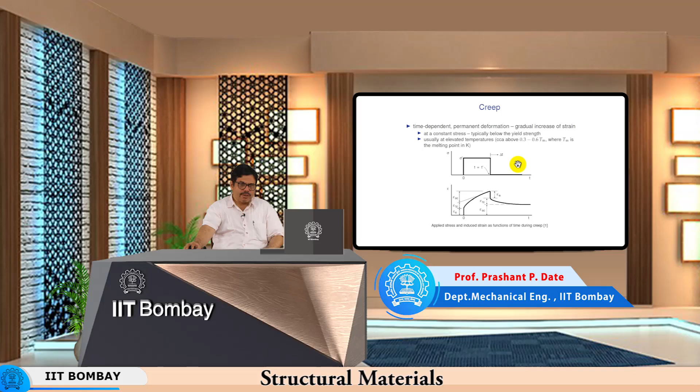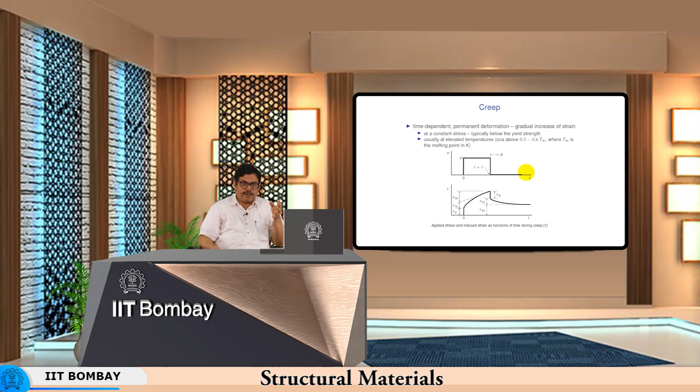We have seen that creep is basically a time, temperature and activation energy controlled process, and it happens at a constant stress, typically below the yield strength. So, there is a difference between the consideration of the stress being maintained below the yield strength. Normally when we design a high temperature boiler or an engine cylinder, it is subjected to a lot of internal stress as well as temperature. And now in spite of being below the yield strength, supposing one has used a yield limited design, let us say one has designed a boiler to consider yielding and fatigue related issues, a leak before break type of paradigm.

Still it is not enough to design a pressure vessel based on these two considerations. One has to look at the creep related issues also, because even if the material is below the yield strength during operation, since it is working at a high temperature for prolonged periods of time, it can still undergo a significant amount of creep strain. What is a significant amount of creep strain depends upon how much strain would be permissible, how much strain would not interfere adversely with the functioning of that high temperature pressure vessel or high temperature equipment, and that is something that one has to decide. So, we look at the mechanical behavior of the material under creep conditions.

Creep is basically a phenomenon that occurs below the yield strength. You might not have stressed the material beyond the yield strength, but the mechanisms which operate are time, temperature and activation energy dependent. Basically diffusion is the rate controlling mechanism. So, it has nothing to do really with dislocation movement. When you talk about yielding, yielding is something that occurs when the dislocations just start moving, but here there is nothing like dislocation movement. The creep will take place purely governed by diffusion. So, that is where the strain can occur even below the yield strength of the material.

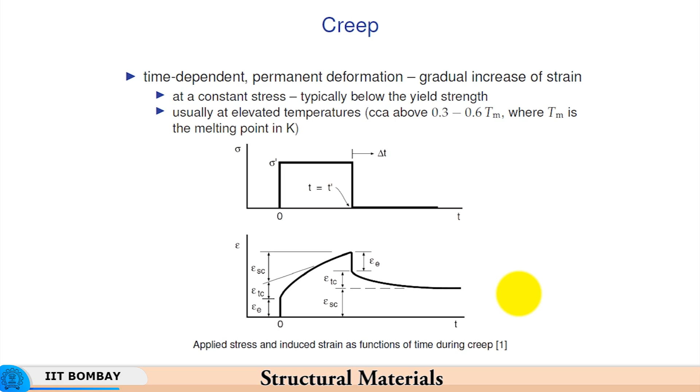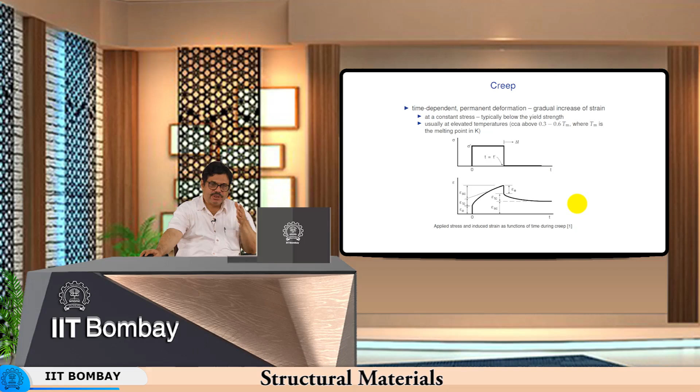And so, the life of the component, for example, you have certain tolerances given for certain dimensions, and because of creep over a period of time these dimensions get distorted or these dimensions increase, let us say. There is a strain in the component. Then as a result of that creep strain, the component has to be replaced because it is no longer able to function the same way as it is designed to function. So, the life of the component can often be curtailed, not because it has yielded, but because it has acquired a certain creep strain after functioning for a prolonged period of time under high temperature and high stress.

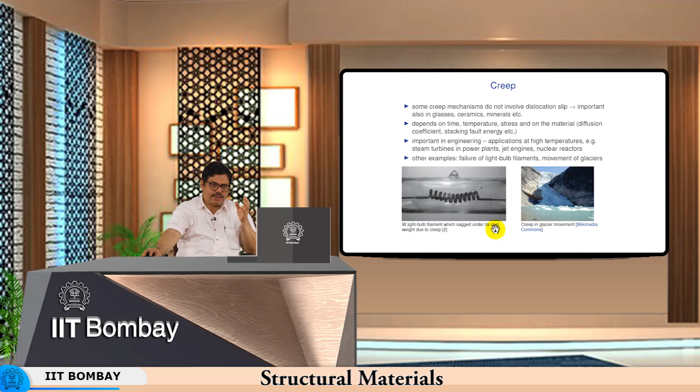Now, some creep mechanisms, as has been said, do not involve dislocation slip, and one of the classic examples of creep is the creep of the heating element in an incandescent lamp, where over a period of time it gets heated up and then it sags progressively due to creep. Under its own weight it sags, and therefore after a certain duration of service at the service temperature, it will finally sag beyond limits, meaning it will break.

So, that is how creep damage gets accumulated in this filament. It is important in engineering applications like steam turbines in power plants, jet engines, and nuclear reactors. Typically, steam turbine blades have to withstand very high temperatures. Even gas turbine blades have to withstand even higher temperatures, because steam turbines operate at much lower temperatures compared to gas turbines. In gas turbine power plants, the temperatures to be withstood are even higher, and then with the

pressure acting on the turbine blade, the temperature is an excellent recipe for the turbine blades to change their size and shape. And so, beyond the limit, the turbine blade will become completely inefficient in converting the energy in the high pressure gas into power. Essentially then the blades have to be changed because of the change in the blade angles or blade geometry as a result of creep. And creep is inevitable when a material is exposed to high temperature and pressure for a duration of time. Jet engines, nuclear reactors.

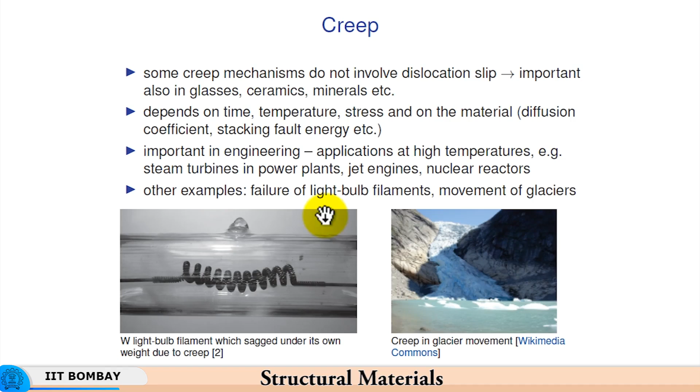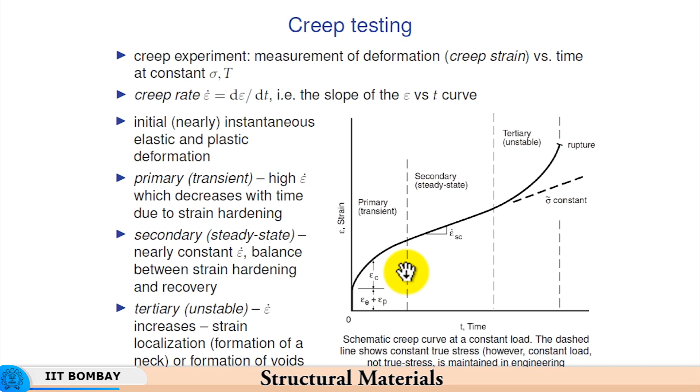So, generally we have three stages of creep. One is the steady state creep, which is of interest to us. The primary creep is the transient creep, which lasts for a very short period of time, but then here this is the most important zone. So, we need to widen this zone to the extent possible and not get into the tertiary creep region until the material ruptures. So, we have seen the corresponding creep strains and the effect of stress and temperature.

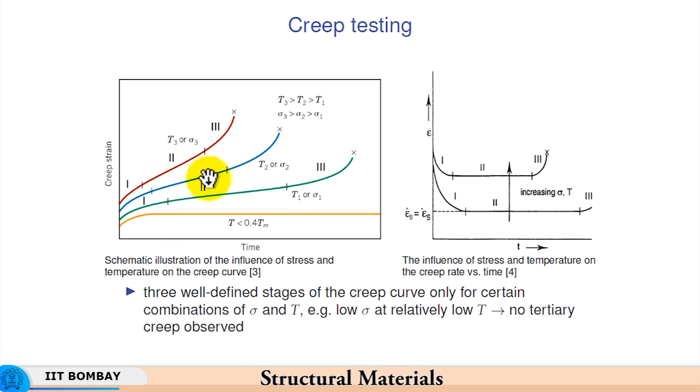So, as stress and temperature or both increase, the creep rate also increases. The steady state creep is higher at higher temperatures and higher stresses. Here we see that the rupture life comes down as the stress increases, and also with increase in temperature. This is again because of the creep damage or the creep strain getting accumulated continuously, and after a certain time it would rupture. Now, you have creep strain rate under steady state.

The creep strain rate continues to increase with time, and for a given time the stress which can be withstood diminishes with increase in temperature, because then creep will become increasingly faster with an increase in temperature. So, at a smaller temperature the material can withstand higher stress for the same creep strain.

Since creep is something that happens over a long period of time, we need to understand the properties within a reasonable duration of testing. A tensile test, for example, might last for say 20 minutes, 25 minutes, half an hour, but a creep test might last for several years. So, the creep strain which might be measurable can be generated over a long period of time of several months or several years. Since we do not have so much time to wait and get the results out, from an application point of view we need to finish the creep test in a reasonable period of time, and that is the reason why we need accelerated creep tests.

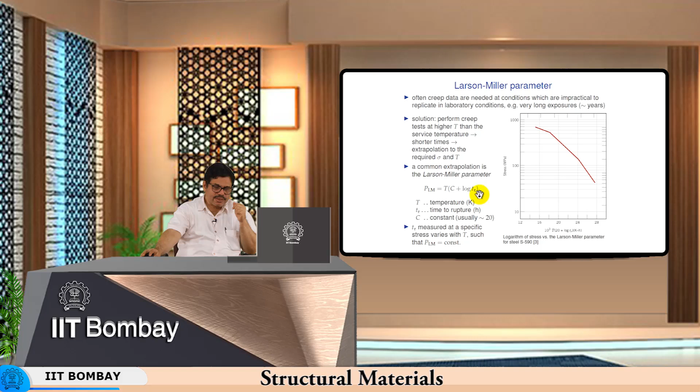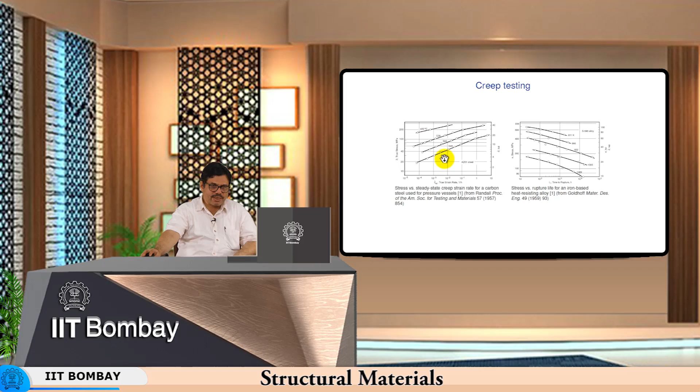Now, to bring together two of the three parameters, we have stress, time, and temperature. So, instead of having a 3-dimensional plot, we can generate a 2-dimensional plot only by combining the effects of temperature and time, because as temperature increases or as time increases, the effect on stress, as we saw in the previous graph here. So, as the time increases or temperature increases, the stress levels behave in a similar way.

So, what we need to do is combine the effect of temperature and time. If the temperature is higher, time for rupture is lower. If temperature is lower, time for rupture is higher. As we see here from this creep rupture test also, for a given stress, at high temperature you have a smaller rupture time. At 550 you have a larger rupture time, and at 800 degrees centigrade it will rupture faster. So, the stress is lower and rupture is faster.

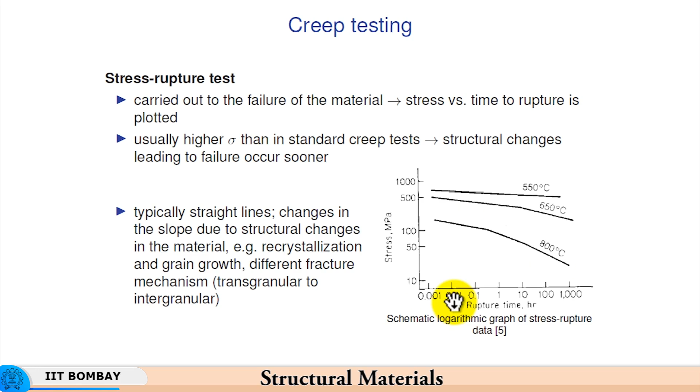So, what it means is that rupture time and temperature of testing both act in the same way on the stress: the stress capability gets reduced with increasing temperature, and it gets reduced with increasing time, as the creep strain increases. So, that is the reason why we can combine the effects of temperature and rupture time into a Larson-Miller parameter,

which is given here. And then you plot this parameter in terms of C plus log of time to rupture, where the time to rupture is in hours, and C is a constant, 20. One plots this in terms of 1000. So, this is 12,000, 16,000, 20,000, 28,000 and so on. So, the Larson-Miller parameter is plotted in thousands. One can plot the stress here, and then you see three discrete zones in terms of rate of decrease of

stress. So, the stress capability is reduced with increasing Larson-Miller parameter. For a given Larson-Miller parameter, say 16,000, various combinations of temperature and time to rupture which give the same Larson-Miller parameter will result in the same single value of stress capability. So, that is what it means. Once the Larson-Miller parameter is constant, the stress capability remains the same. That is the advantage of combining these two effects. That is why there is a one-to-one correspondence between the stress capability and the Larson-Miller parameter, which is a combination of temperature and time to rupture.

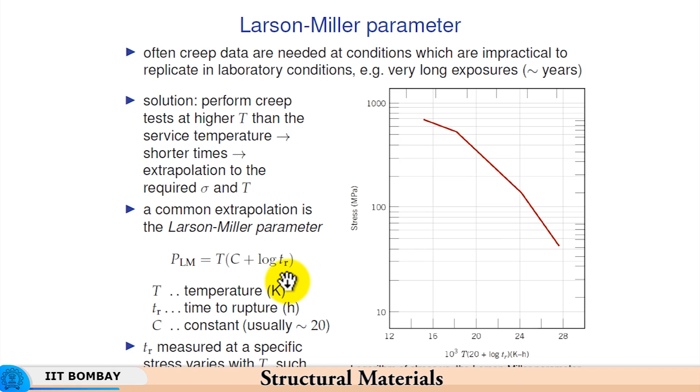Now, comparatively, the strain that is recovered here differs between polymers, metals and ceramics. In polymers, practically the entire creep strain can be recovered, because the mechanism of deformation is different. You have chain molecules which get extended during the creep process, and then they can contract as the stress is brought down, and then you have a complete recovery of creep strain. So, creep is not such a major problem in the case of polymers,

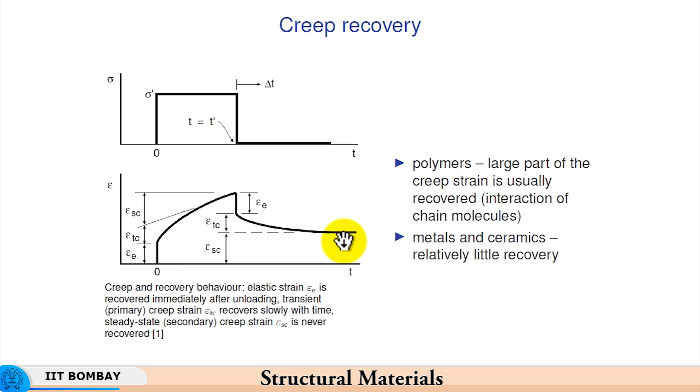but for metals and ceramics the recovery is very little. So, this is the final creep strain at the maximum load, but when you release the load, not everything gets recovered, very little gets recovered here, and that is the reason why one needs more attention with metals and ceramics. Creep of metals and creep of ceramics requires greater attention because of the creep strain being retained to a substantial degree.

The structural changes that take place during creep are diffusion related changes. There is a lot of diffusion taking place because of time, temperature, activation energy type of processes operating in the material. The deformation at elevated temperatures is usually inhomogeneous, and as the temperature increases, the component of dislocation slip will reduce, subgrain formation will take place, and recovery processes will start, and grain boundary sliding will become increasingly important as the temperature goes up, because as the temperature exceeds the equicohesive temperature, grain boundary sliding will dominate the entire set of mechanisms. That is the reason why with increase in temperature, the three different mechanisms which are concurrently operating will change in terms of emphasis, or contribution.

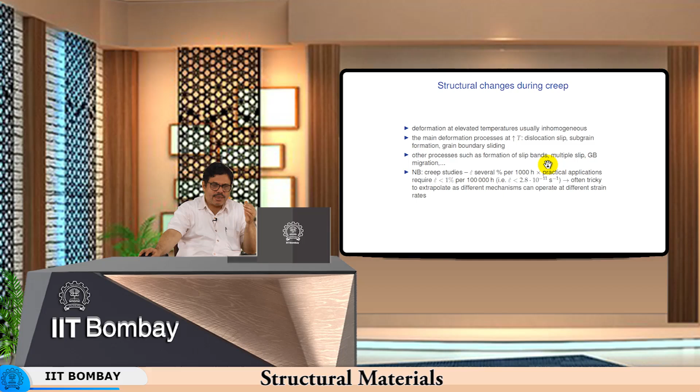So, formation of slip bands, multiple slip, grain boundary migration. These are also processes which depend upon the dislocation density of the material. For example, if the dislocation density is very high, then grain boundary migration can take place. If there is a big difference between the grain sizes, then bigger grains will grow further in size at the expense of the smaller grains. So, different kinds of processes resulting in change in the grain size would take place during the course of creep.

So, if you have very small grain size initially during the entire creep process, there can be some growth in the grain size, but then on the whole the creep resistance comes down. The strength under creep comes down with increase in temperature and increase in grain boundary area, because the grain boundary becomes weaker at high temperatures, and therefore most of the deformation gets concentrated in the grain boundaries, and so the resistance to deformation goes lower and lower as the grains become finer under creep conditions. So, we need as large a grain size as possible so that the creep is resisted.

Now, what we are looking at, the amount of creep strain, as I told earlier, is extremely small strain developing over a large period of time. So, we have a strain rate of less than 1% per 1 lakh hours. Okay. So, basically 2.8 into 10 to the power minus 11 seconds inverse is the strain rate, I mean an order of magnitude of strain rate that can be tolerated. I am not saying expected, because expected is 0, but you cannot avoid creep strains at high temperatures and stresses. Therefore, the strain rate has to be maintained.

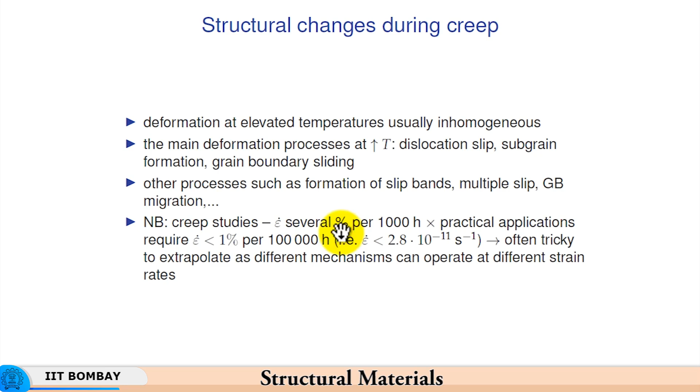Mind you, the loading is below the yield strength, the loading is below the yield point of the material, and so your creep strain rate has to be maintained below a value of, let us say, 2.8 into 10 to the power minus 11 seconds inverse, right. So, this is a strain rate which is a total outcome of various mechanisms operating concurrently. Now, different mechanisms and different slip systems can come into operation at high temperatures, or they can get activated at high temperatures. So, that is how the structural changes take place during creep.

When you have dislocation slip taking place, then Mg and Zn undergo non-basal slip. Normally, basal planes of the hexagonal close pack structure are one of the most favored planes for slip, particularly when the temperatures are relatively low. The slip system involving the basal planes of the HCP crystal is very active, but as the temperature increases, different slip systems like non-basal, that is prismatic slip systems, get activated, and they are the ones which can take over. So, the resistance to creep deformation will change depending upon the plane on which slipping is going to take place.

Similarly, other slip systems such as 100 are not really favorable slip systems under normal conditions. So, 111 is a favored slip system under room temperature or low temperature conditions, but some of the so-called unfavorable planes also get activated above 200 degrees centigrade. So, basically those planes which are not really close packed planes in a face centered cubic crystal can also get activated, because now, mind you, you are not talking about creep strain as a result of purely dislocation movement. There are many other mechanisms like diffusion which are going to get activated, and so the other slip systems, which are not as close packed as a 111 plane, can also get activated. So, non close packed planes and directions can also get activated only because of a high temperature.

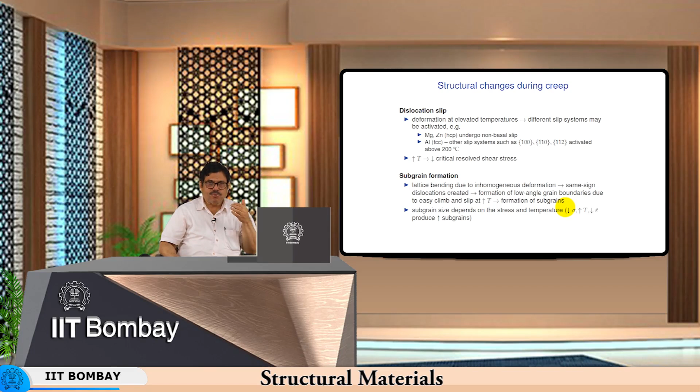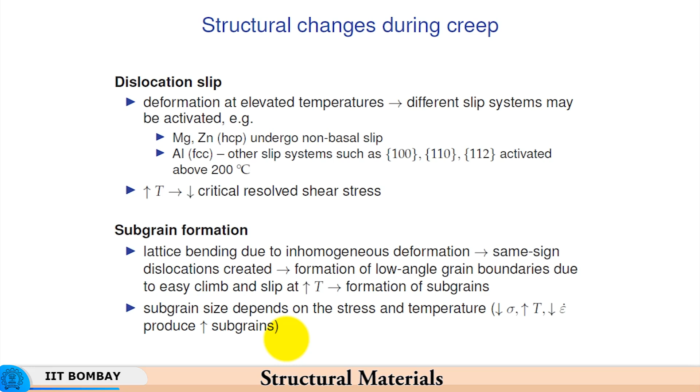So, as the deformation due to dislocation gets accumulated, same sign dislocations are created, then the subgrain boundaries are created, and these subgrain boundaries finally become grain boundaries of a very low angle. So, these subgrain boundaries get developed into low angle grain boundaries subsequent to recrystallization, and subgrain size depends on the stress and temperature. So, as the temperature increases, stress is lower, strain rate is lower, it produces larger subgrains. If the stress is more, strain rate is more, then the subgrain size would reduce, because the dislocation density will be more, the subgrain boundaries will be much closer to each other, and therefore the size of a subgrain would be much less in case of high stress and high strain rate.

We have seen that the structural changes during creep include another phenomenon called grain boundary sliding, where there is shear across the grain boundaries, and this grain gets displaced with regard to the other. So, here you have created a deficiency of material, you have excess of material, and this is compensated by other mechanisms like diffusion, for example.

So, that is the reason why the process is diffusion controlled. For example, if this is grain boundary sliding that is taking place, and then it introduces deficiency of material on one side and excess material on the other side, we need some transport mechanisms to maintain the continuity of the material, to prevent any discontinuities in the material from being created, and therefore, we need mechanisms like diffusion and grain boundary migration to take place, so that these deficiencies get compensated for, material which was in excess here gets transported here.

So, that is the kind of process. So, that is the reason why diffusion becomes the rate controlling process. So, the creep rate depends upon the rate of diffusion.

Now, if you take materials like tungsten, refractory alloys like tungsten rhenium or molybdenum tungsten and so on, there the creep rate is so low because the diffusion is very small, the diffusivity of atoms is extremely small, diffusivity of solutes through the crystal structure is extremely small. These are all body centered cubic materials, the refractory materials are usually body centered cubic, be it tungsten or molybdenum, and these materials permit very little diffusivity through the lattice.

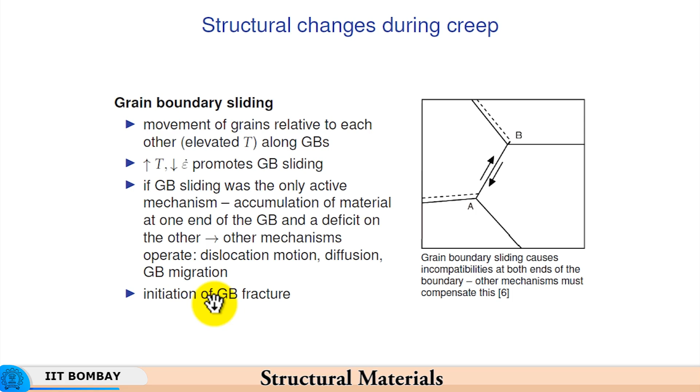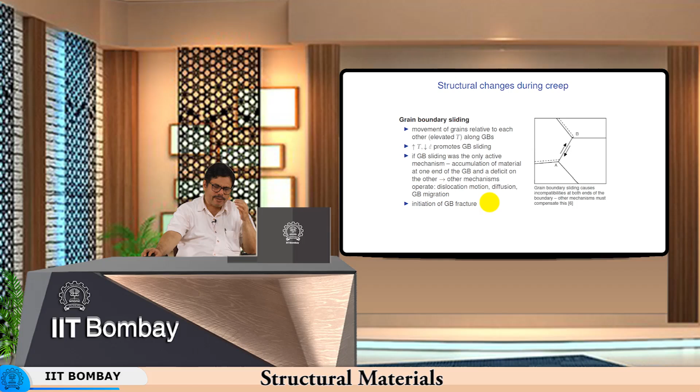So, if the diffusion does not match the rate of grain boundary sliding at some point, then fracture takes place, grain boundary fracture. In fact, the triple junction will start, because these three grains may start moving away, and then you will generate a void at this triple junction, which will propagate and finally end up as a failure. So, the grain boundary fracture finally will take place if the creep mechanisms do not operate in unison, or they don't compensate for each other adequately.

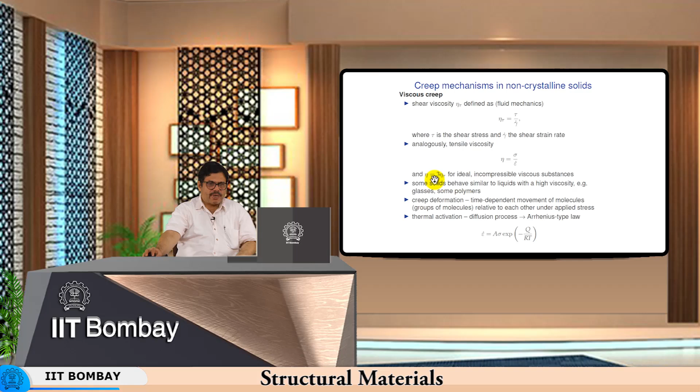So, if you take viscous creep, increase in viscosity at the grain boundary would take place. I mean, it would vary depending on the temperature. So, this is the shear viscosity, tau upon gamma dot, shear stress divided by the shear strain rate, and the tensile viscosity analogously is sigma by epsilon dot. And if we take the viscosity in tension and in terms of viscosity under shear, the viscosity under tension is 3 times the viscosity in shear. So, that is what one can derive for ideal incompressible and viscous substances.

So, you have some solids which behave similar to liquids with a high viscosity, like non-metallic materials such as glasses and polymers, because the whole mechanism of deformation is different. Glass is a supercooled liquid and it is amorphous in nature, and therefore you will have viscous effects which will be the only ones which play a role in deformation of the glass or creep of these glasses at high temperatures.

Similarly, polymers. Creep deformation involves time dependent movement of molecules or groups of molecules relative to each other under the applied stress. So, in particular in case of polymer type of materials, thermal activation, which is in the form of diffusion process, follows the Arrhenius type law, which is something like this. So, this is the Q, which refers to the activation energy for that particular mechanism.

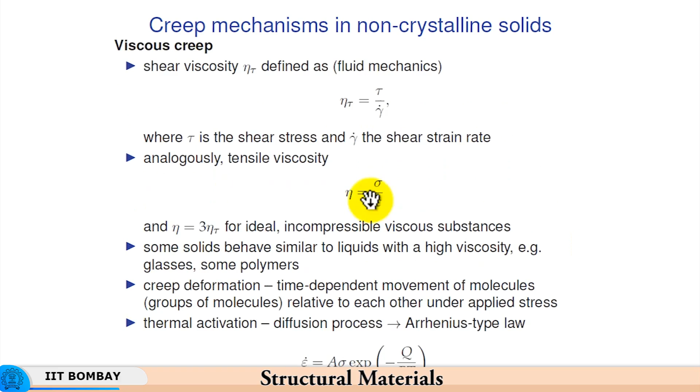So, Q takes the value of the operating mechanism. It is not a general value. The value of Q at any given temperature and stress condition would be determined by the operating mechanism. So, if diffusion is the rate controlling mechanism or the major mechanism, you will have Q of diffusion. That is why we have different creep mechanisms and the corresponding equations and corresponding strain rates for different mechanisms.

So, now we have creep in polymers also. The creep is significant above the glass transition temperature, and that is when the polymer tends to behave more like glass. Tg of common polymers is 100 to 200 degrees centigrade, and so creep is often observed even at room temperature, but at 100 to 200 degrees centigrade it is very significant. So, above Tg, hydrogen and van der Waals bonding is less effective. Molecular chains can slide past each other.

Under room temperature conditions or low temperature conditions, these secondary forces or secondary bonds are quite strong, and therefore the sliding of the chains relative to each other is hard, because in polymers you have macromolecules which are folded over each other, and so these molecular chains have to slide so as to deform. Now, if the ease of sliding increases by weakening of these hydrogen and van der Waals forces, then they can slide past each other, and creep becomes easier in polymers with linear molecules without cross branching or without intertwining with respect to each other, because this interlocking can increase the creep resistance.

So, if there are linear polymers without any branching, then you have much lesser resistance to creep. So, it all depends on whether you want it to creep or whether you want to build creep resistance into it. If you want to build strength into the polymer against creep, then you need to have branched polymers or cross-linked polymers which will have relatively stronger bonds with each other. Even if the van der Waals forces and hydrogen bonds become weaker, still you have so many of them that they can still pose a significant resistance to creep.

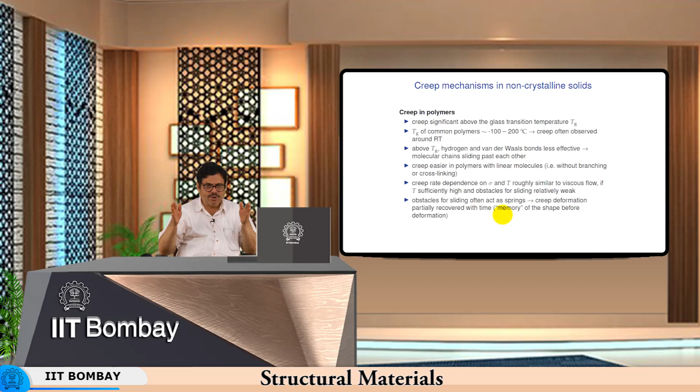So, obstacles for sliding often act as springs, that is, creep deformation is partly recovered with time. So, basically if you remove the load, the spring will retract normally, right. If you remove the extension load on the spring or compression load on the spring, it will tend to come to its original position. So, the creep deformation also gets partially recovered with time.

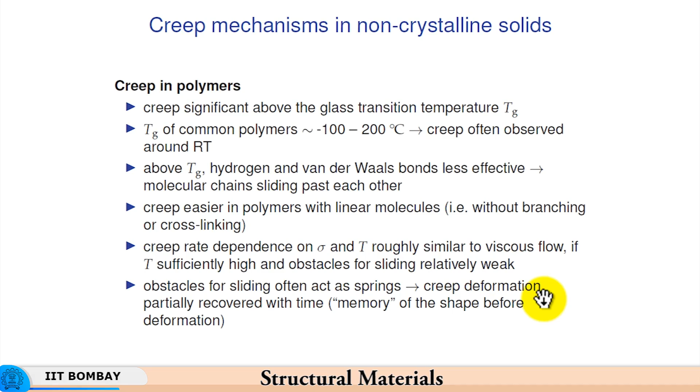So, over a period of time, this creep deformation which has taken place in a polymer can get recovered. In fact, it is often called the memory of the shape before deformation, meaning that the shape taken by the polymer is something that was present before it was subjected to stress, temperature and creep related conditions. We have said that almost the entire creep strain is recoverable in case of polymers, and that is because once the temperature reduces, these bonds become stronger, the viscosity increases, and the entire strain can get recovered as a result of a decrease in temperature. So, that is how the polymers differ from metals.

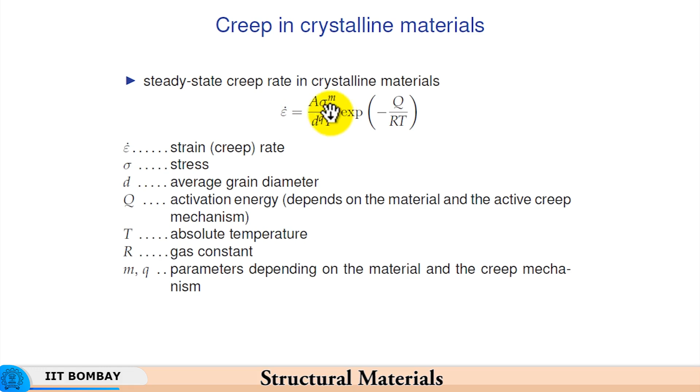Now, if you take crystalline materials, meaning crystalline alloys, metals and alloys, the steady state creep rate in crystalline materials can be given by A sigma raised to m upon d raised to q, times T, exponential minus Q by RT. We have already seen this Q as the activation energy for the operating mechanism. A is a material constant and sigma is the stress, m is the exponent of the stress. Now, d is the grain size, okay, and T is the absolute temperature. So, the strain rate depends on grain size: the smaller the grain size, the larger the creep strain rate. That is the reason why we would like to make the grain size as large as possible, to introduce as slow a strain rate as possible. So, depending on the mechanism, we have these constants m and q.

So, diffusional creep, Nabarro-Herring creep, is the creep deformation that takes place at very high temperatures, and the proportionality is to the square of the grain size. Also, from low to medium levels of stress is something that you can expect diffusional creep, Nabarro-Herring creep. So, diffusion is a major contributor to the creep process. Vacancy diffusion through the crystal lattice will take place, because vacancies are the ones which diffuse through the crystal lattice. Vacancy is actually something that is present at the grain boundary. What we mean by vacancy diffusion is that an atom moves to the vacancy at the grain boundary, creating a vacancy in the crystal lattice, which in turn attracts a neighboring atom, which gets into that vacancy, and the vacancy therefore diffuses through the crystal lattice from where it was generated, where it was born, until it reaches the grain boundary once again.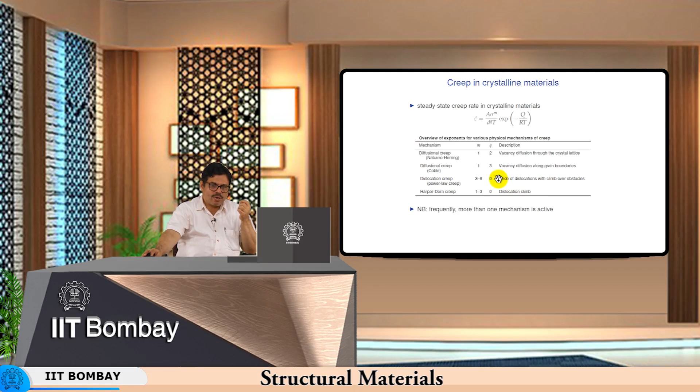So, let me put it that way: vacancy diffusion along grain boundaries will always be present, but at higher temperatures the vacancy diffusion through the crystal lattice will also take place, because there is sufficient driving force in terms of temperature to allow diffusion of vacancies through the crystal lattice, through the grains basically. Then here you have dislocation creep, which occurs at relatively lower temperatures, and you have glide of dislocations with climb over obstacles. Now, the effect of temperature is dislocation climbing over obstacles, and since the temperature is not high enough to eliminate all dislocation activity, there is dislocation activity present. Now, the grain boundaries are not as weak as they are in case of, say, diffusional creep, that is Nabarro-Herring creep. Because the temperatures are relatively lower, the dislocation activity is also present, and therefore m is of the order of 3 to 8. So, the strain rate is significantly influenced by the stress and the corresponding dislocation activity, and then it becomes independent of grain size. So, 0 is the value of q.

So, dislocation creep, or the so called power law creep, is entirely related with the dislocation movement, and it becomes independent of grain size, and so is the Harper-Dorn creep, which depends exclusively on dislocation climb.

So, these are dislocation based motions, or dislocation based creep deformation, and at any given point of time you can have more than one mechanism active. For example, at high temperatures you can have a very small amount of, say, dislocation based creep. Most of it will be dominated by vacancy diffusion through the crystal lattice, but still you can have a very small amount of

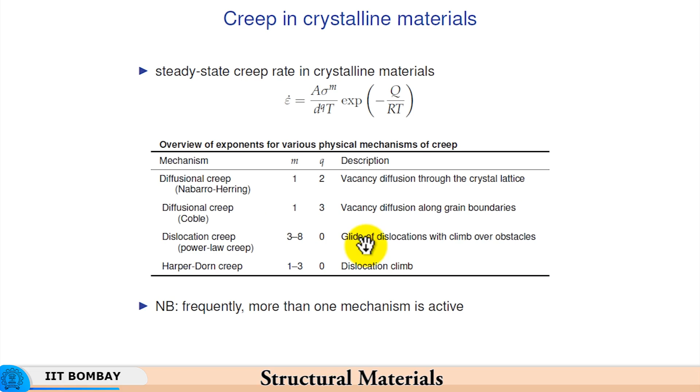dislocation activity. So, as the temperature increases, the contribution or proportion of dislocation activity decreases, and the proportion of diffusion related creep increases, or diffusion related mechanisms go on being dominant. So, these mechanisms dominate at high temperatures. So, this is what I was telling in the previous slide.

You start with the vacancy at the grain boundary, and then there is the so called vacancy sink, where the vacancies again come and get annihilated, or they reach there. Similarly, you have diffusion along the grain boundary. This is a situation in case of Coble creep, which is a relatively low temperature creep. So, diffusion takes place along the grain boundary. So, vacancies move along the grain boundaries, and so smaller is the grain size, shorter is the diffusion path, larger is the grain size, larger will be the diffusion path.

So, the grain boundary diffusion is much faster, much more effective in relatively low temperature creep, which is Coble creep, and so grain boundary sliding takes place here. Grain boundary sliding will also take place over here. The grain boundary sliding will also take place over here, but then in addition to the diffusion along the grain boundaries, there is diffusion through the lattice as well in case of Nabarro-Herring creep.

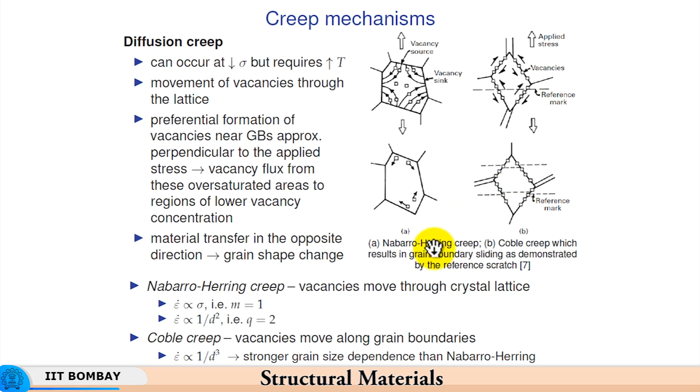Now, the next stage is what is called superplasticity, where you have only grain boundary sliding, practically 100% grain boundary sliding. There is no dislocation activity at all, and that is where you need extremely fine grain size, extremely small grain boundary paths, so that the viscous effects are the ones which dominate the resistance to deformation, and any scratch or any damage gets evened out. So, there is absolutely no effect of inhomogeneous strain rate. The strain rate sensitivity is equal to 1 practically. So, that is the effect of grain boundary sliding. As the temperature continues to increase, the grain boundaries become increasingly viscous. So, we have the same thing which we had seen earlier.

Now, when we come to power law creep, there are different models. So, we have Weertman's model where we say that the dislocation glide is aided by vacancy diffusion. Now, dislocation glide is facilitated by vacancy diffusion, because when an obstacle needs to be overcome, let us say this obstacle is present, normally this dislocation would get held up at this obstacle, and it will not be able to pass through unless it is able to circumvent that obstacle or cut through that obstacle. But now, because of the possibility of diffusion, these 1 or 2 atoms at the top can diffuse out, and then it can lead to dislocation climb, and once it has climbed by, let us say, one lattice parameter, then it can glide avoiding this obstacle.

So, avoidance of the obstacle is facilitated by dislocation creep, where dislocation movement is the one that governs the strain rate. So, the faster is the dislocation movement, the faster is the strain rate, and the strain rate reduction due to the dislocation getting held up at an obstacle is prevented, or one can circumvent this obstacle by dislocation climb. Many times what happens is the interface between the obstacle and the matrix comes under heavy strain as the dislocations get piled up at that interface, and finally that interface itself gets damaged, and then the dislocation can circumvent the obstacle and finally move forward.

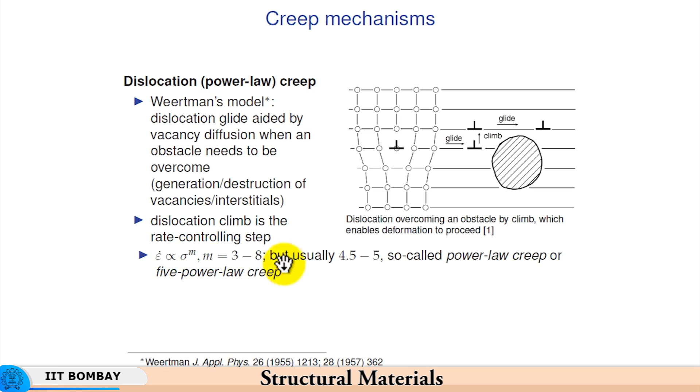Another mechanism for creep is the Harper-Dorn creep at high temperatures and low values of sigma. Again it is observed in coarse grained aluminum and some minerals, ceramics, etc. So, this mechanism is slightly different. Creep rates are about 1000 times greater than those predicted by Nabarro-Herring creep. Because of high temperatures you would expect the Nabarro-Herring creep mechanism to operate, because you have a sufficient driving force for the vacancy diffusion along the grain boundaries and vacancy diffusion through the grain.

But the creep rates are 1000 times more, meaning there is one more mechanism operating, which means that a dislocation climb mechanism is operational, which is aided by the vacancy migration. So, there is one more mechanism coming into play. In addition to vacancy diffusion, it is vacancy migration.

So, when there is a compressive stress, vacancies are attracted to the dislocation line and the dislocation moves upwards, and the opposite effect is found for the tensile stress, meaning the vacancies get repelled from the dislocation line, and so the dislocation cannot move upwards, and therefore the creep resistance can increase. So, the creep rate can reduce. So, basically what we are saying is that Harper-Dorn creep can explain the difference in the creep resistance under tension and compression. So, the creep rate under compression could be much greater than the creep rate under tension.

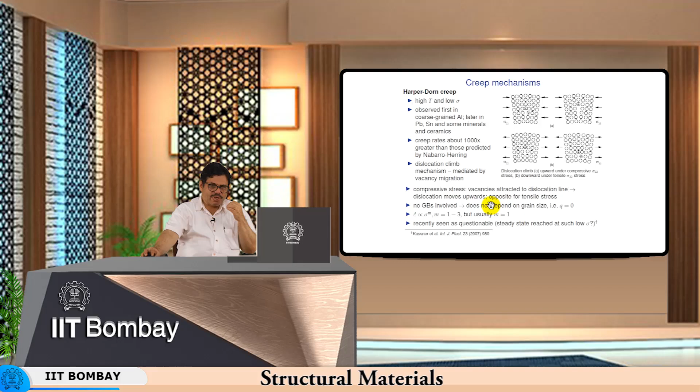So, here no grain boundaries are involved, and so it is independent of grain size. Naturally, since it involves dislocations, if your dislocations are getting attracted towards the vacancies and climb is aided by the vacancy migration, then the strain rate would go up, and so the sensitivity is between 1 to 3, but usually the strain rate is directly proportional to the stress applied, because you have dislocation climb which is aided by migration of the vacancies. So, basically it is a dislocation mechanism that is operational, dislocation climb being aided by the compressive state of stress and the vacancies getting attracted to the dislocation.

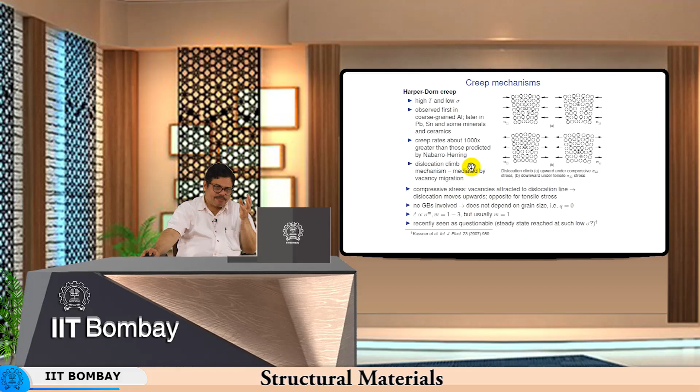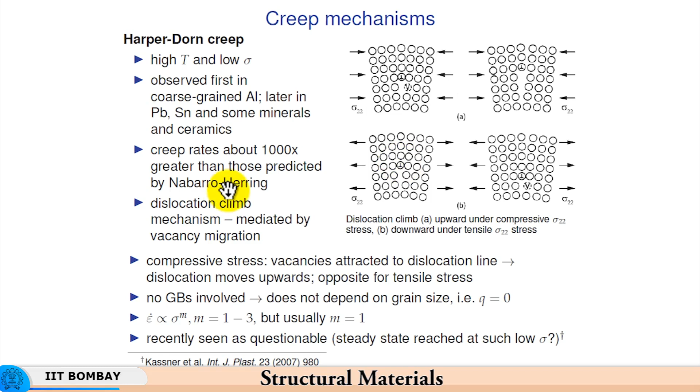Well, like many theories, you can have various opinions about it, but one can definitely say that when a number of mechanisms are operating in parallel, one can think of Nabarro-Herring creep. Also, in addition to that, the vacancies while diffusing through the grain can also aid dislocation climb, and therefore have a synergistic effect. So, the creep rate might not be explainable purely based on diffusion using the Nabarro-Herring mechanism. So, this Harper-Dorn creep mechanism could be aiding the increase in the strain rate for a given level of stress.

Now, dislocation glide alone is something that will need much higher stress, because now you are not talking about dislocation climb or something like that. So, you need very high stresses related to the shear modulus. Above a certain stress, the steep dependence of strain rate on the applied stress comes into play, and so sometimes the sensitivity of strain rate to the stress increases significantly, to the power of 10. So, the classical power law breaks down, meaning the dependency of up to say 4.5 to 5 which we saw earlier.

It is no longer valid because much higher stresses are needed in order to generate the kind of strain rate, the same deformation mode as in conventional plastic deformation at ambient temperature. So, here one would expect this at very low temperatures, because you have high stresses relative to shear modulus, and here the dislocation activity would be the maximum, very significant, and very little temperature effect or very little effect of diffusion related phenomena would be found at relatively low temperature. So, low temperature creep would essentially mean a creep by dislocation glide.

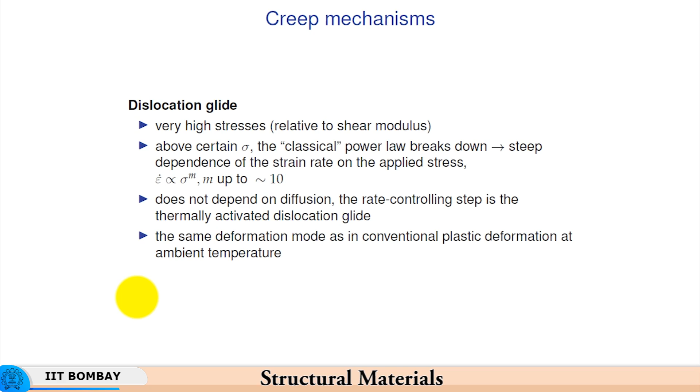So, these are the plots of the different creep mechanisms, and ln sigma versus ln epsilon dot has been plotted. So, you have diffusional creep which has m equal to 1, so it is proportional. Even Harper-Dorn creep, you have m equal to 1 to 3. So, here also it is proportional to sigma, and then you have dislocation creep which is 3 to 8. So, the strain rate increases very rapidly.

Why? Because now the dislocations can climb, they can overcome the obstacles. So, for a relatively low stress, or a small change in stress, the strain rate can go up quite significantly. So, even if you have dislocation creep, by virtue of dislocation climb being facilitated, you get much higher strain rates.

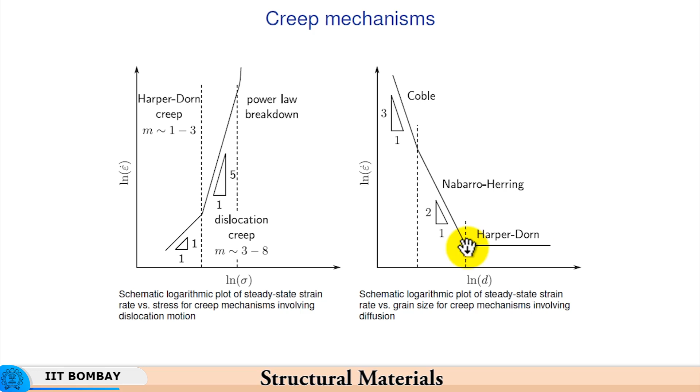Now, if you look at the grain size effects, as the grain size increases, the strain rate drops very dramatically, because the grain boundary area is reducing very significantly. So, if you have a certain grain radius, the grain boundary area is going to decrease as the square of the radius. So, as a result, you have very rapid decrease in the strain rates as the grain size changes. If the grain size becomes double, then the grain boundary area becomes 1/4. So, that is the reason why the diffusion controlled processes, Coble and Nabarro-Herring creep, get affected the most, whereas Harper-Dorn creep, which is independent of the grain size, continues irrespective of the grain size.

So, here we have the Ashby-Weertman maps, where we lay out different mechanisms. For homologous temperatures of up to 0.5 to 0.6, let us say, you have only elastic deformation up to the yield point. So, you have conventional plastic flow up to a point, maybe at a homologous temperature of 0.4. At higher stresses, let us say at 0.4 to 0.5 homologous temperature, you have dislocation creep taking place. So, this is the situation where, let us say, you have a boiler which is very heavily loaded, and the stresses are a little lower than the yield strength, but very close to it.

So, you have what is called dislocation creep taking place, and as the temperature keeps on rising up to even 0.75 or so, you need much greater stress to cause dislocation creep. On the other hand, with increase in temperature, even at low stresses, there is enough driving force for grain boundary diffusion to take place, as in case of Coble creep. So, Coble creep will occur at relatively low stresses, but temperature being the same and stress being high, you have dislocation creep taking place, aided by the vacancy diffusion.

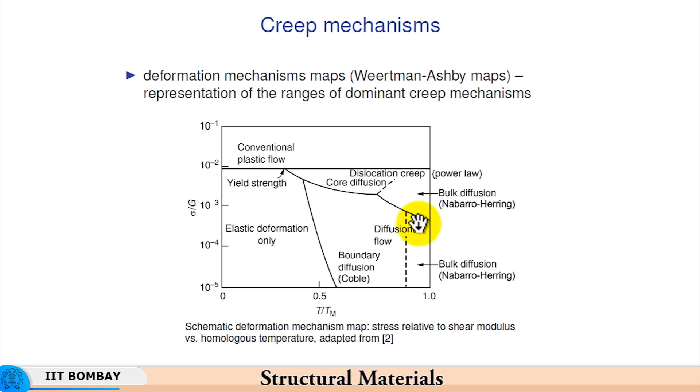And then here you see that there is bulk diffusion taking place at high temperatures and even low stresses, because the driving force is sufficiently large as to cause vacancy diffusion through the lattice. So, bulk diffusion means diffusion of vacancies through the lattice. So, here you have bulk diffusion even at higher stresses as well as lower stresses. You have diffusional flow at high temperatures, low stresses, and then dislocation creep due to core diffusion, meaning diffusion along the grain boundaries and vacancies aiding the climb of dislocation. So, dislocation creep, but then dislocations are able to climb due to high stresses, vacancy migration due to high stresses, and due to some diffusional flow as well.

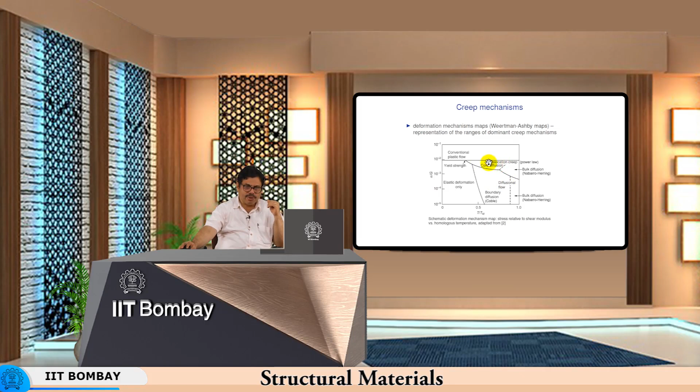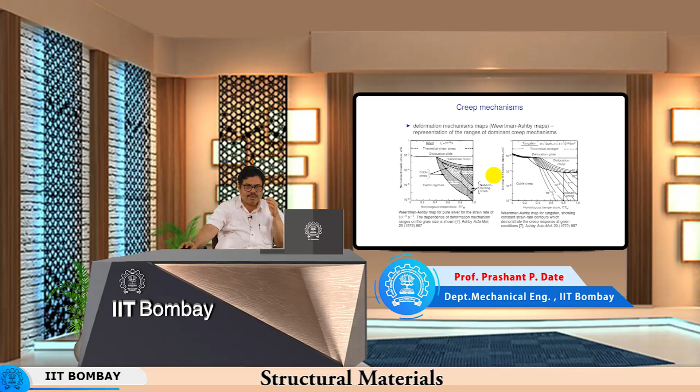So, with this we will see the mechanisms operating for different kinds of materials, different kinds of strain rates, so silver, tungsten and so on, in the subsequent class.